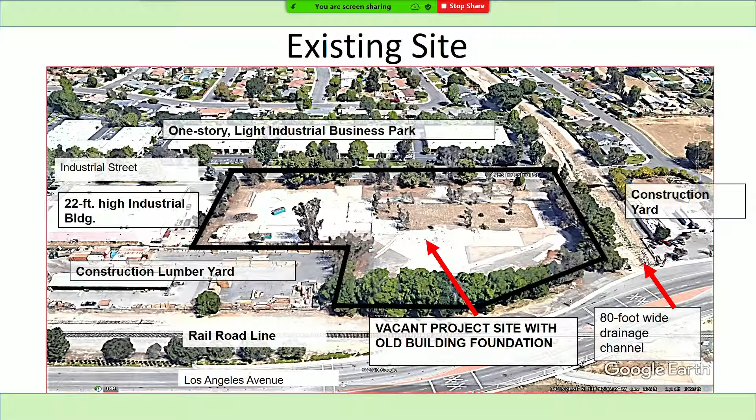So currently, just to recap, this is the current location, that's the vacant lot. It's surrounded by industrial uses to the north, east, and west, and by the railroad tracks to the south.

Here is the north elevation of Building A. The previous elevation is on top and the proposed is on the bottom.

All of the revised elevations will include corrugated metal panel accents, patterned concrete panels, colored stucco, concrete masonry units, stone veneer, clear glazing, metal canopies, and aluminum composite panels that add more detail and articulation to the buildings. The building's colors remain predominantly gray hues, but different materials, textures, and surface finishes add variety. For example, the applicant added aluminum composite panels and stone veneer to Building A, with metal panels and scoring in similar colors applied to the other buildings, varied with different finishes. To give more depth, shadow, and definition to the elevations, the horizontal and vertical scoring will be accentuated to provide separation between panels that are on the same plane but have different patterns.

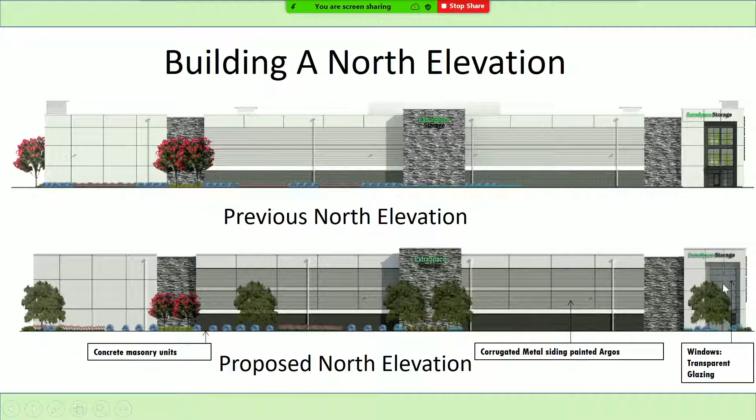So if you notice on this elevation, you can see the cursor here showing they added the concrete masonry units, shown in black. Also the corrugated metal siding panel, in the color Argos. And the window includes some transparent glazing.

This is the north perspective of Buildings A and B. This is the rendering.

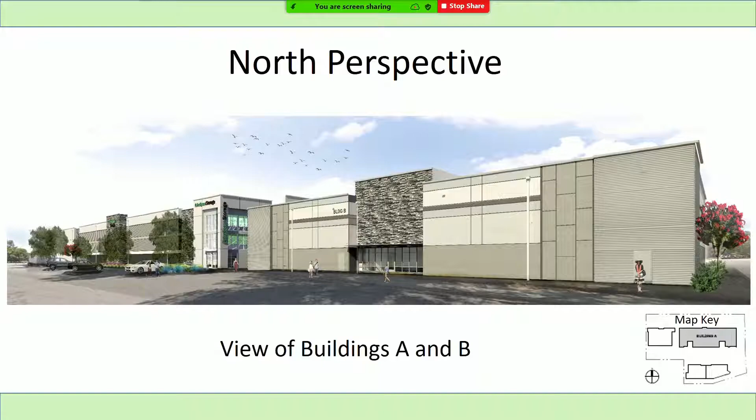Here's Building B's elevations. You'll notice the brick veneer, this time a little darker, and they added some additional score lines to break up the building. You have different colors, some hues of grayish-green, and the stone color itself, along with horizontal metal siding with a 4-inch box rib.

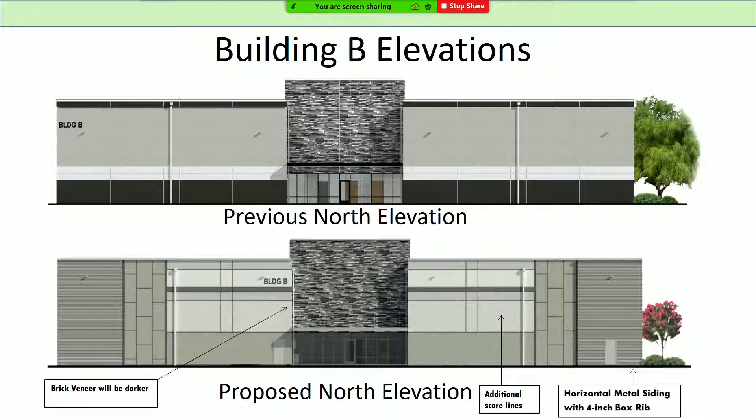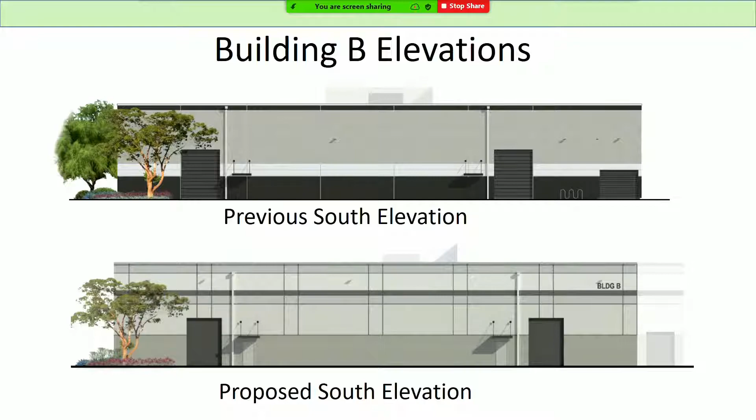Here's Building B's south elevation as well, and the southwest perspective of Buildings B and C. This is the perspective from the lumber yard on the west side. Based on comments from the Commission at the last meeting, they were looking to add more landscaping along with articulation on those south elevations.

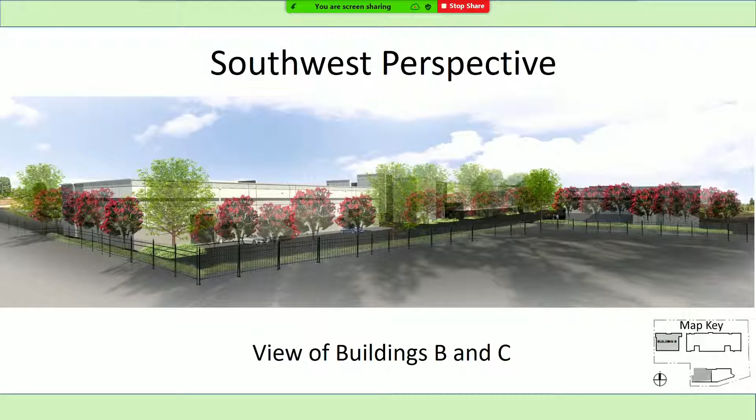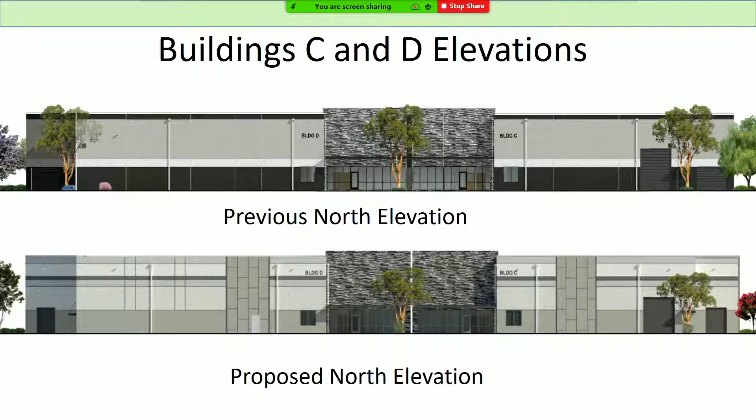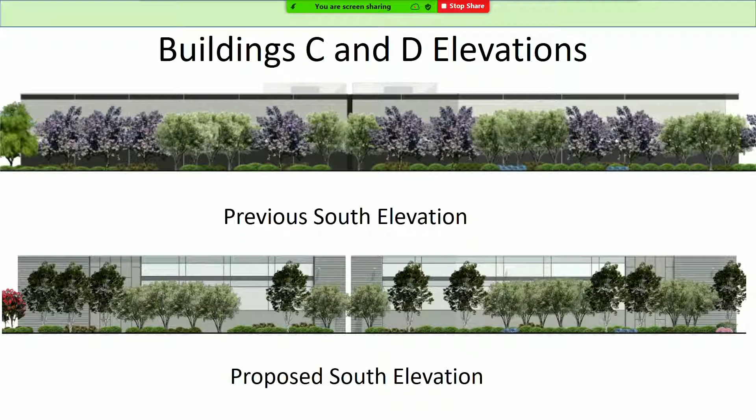Here are the north elevations of Buildings C and D, and here are the elevations for Buildings C and D on the south side, previous and proposed, with landscaping. Here are the elevations without landscaping from the south for Building C and D facing Los Angeles Avenue, showing they've added a concrete reveal pattern and additional score lines to break up the colors with white, black, dusty blue, and beige. Once again, they've added horizontal metal siding with a 4-inch box rib.

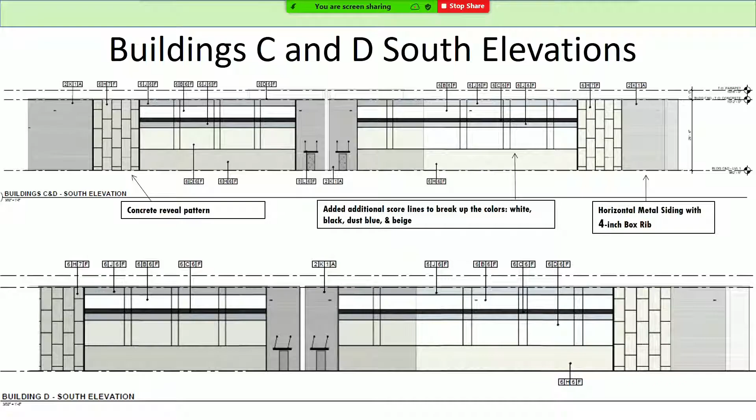And here is the south perspective from L.A. Avenue for Buildings C and D.

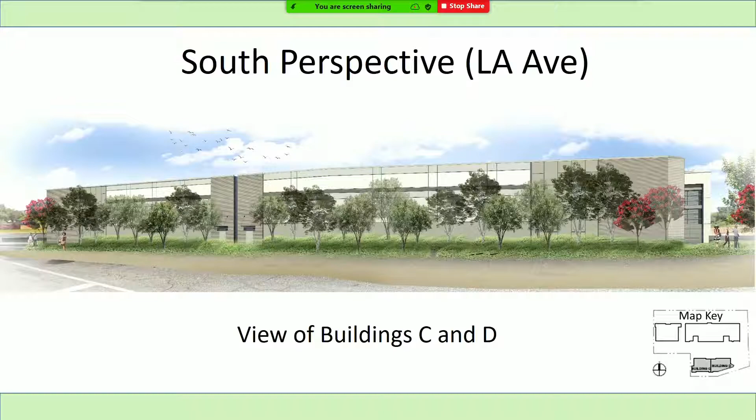Staff recommends approval of tentative parcel map TPS 692 and CPS 827. This concludes the presentation. Staff will answer any questions.

Do any of the commissioners have any questions of staff? No. Hearing none, we will now open for...

...the public testimony portion of the hearing. Would the applicant like to present the project? I'll remind the applicant, you have 15 minutes for your presentation.

Yeah, this is Robin Murphy. Can you hear me? Yes, we can. I can hear you, yes.

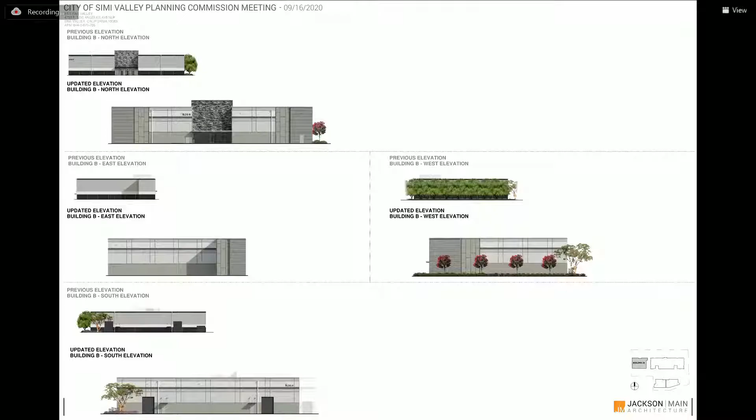Excellent. I am with Jackson Main Architecture. I'm a principal here. I also have with me Natalie Doyle, who's going to show the graphics, and Ann Judkis is here as well. Ann has been working on this through several different planners for the last year and is very familiar with the project.

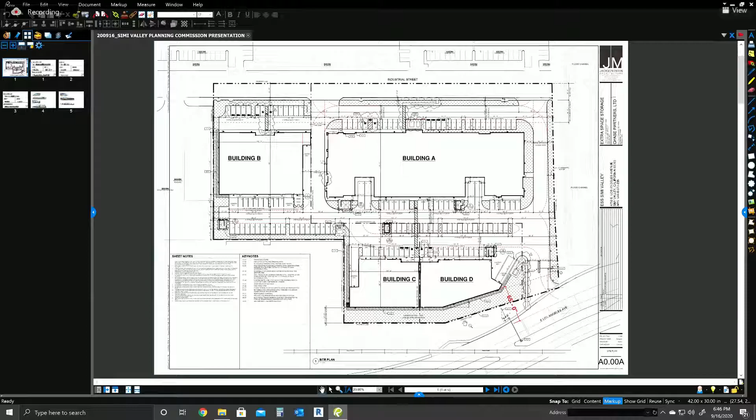There weren't a lot of comments about buildings A and B, as I think the Assessor noted. Most of the comments were on C and D, and we're going to go through those in a little bit more detail. C and D have a 27.5-foot landscape buffer and trail to the south of the property line, plus some right-of-way separation and some landscaping that totals, at closest, approximately 65 feet long, so that's a big separation.

We've tried to represent that in the renderings. Let's go to the elevations, Natalie.

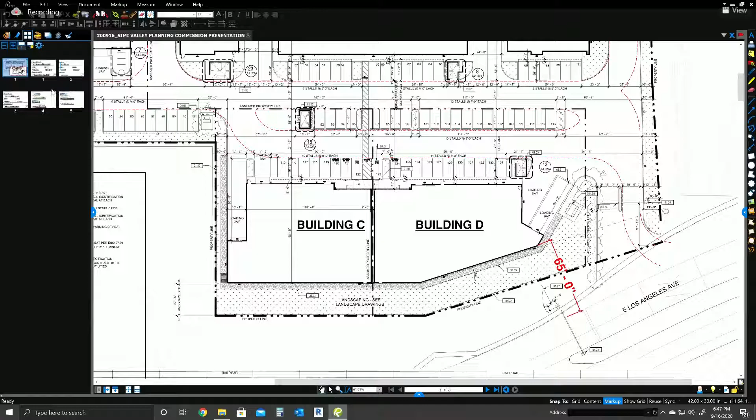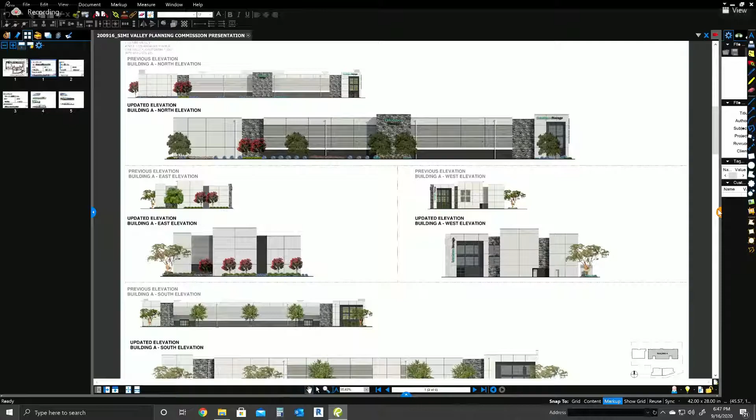We thought the best way to explain this would be to show what we previously presented versus what we're proposing. As the Assessor went through these elevation by elevation, I'll cut my explanation a little shorter. In general, what we're looking at here is building A. At the top is building A's prior elevation, and right below it at a larger scale is what we're proposing today.

The main thing here is we're trying to tie these buildings together. There's not a lot of fenestration in storage buildings, and certainly not in industrial buildings either. So we're trying to concentrate interest into the corner elements, and that's what we've done in the storage building. That hasn't really changed other than the addition of some higher quality materials, ACM panels on the ends.

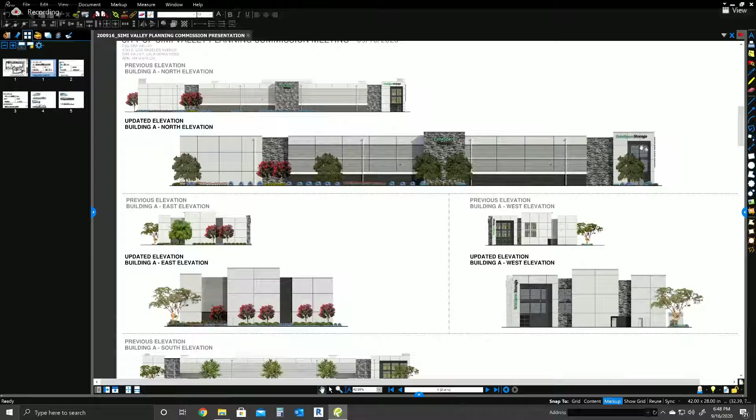One of the things we wanted to do was tie the horizontal elements together better, and we did that by tying some trim lines from the upper stucco line through the horizontal metal panels - you can see that right there, and it terminates right above the CMU. So this is giving it a little more texture, and we've done this on all the buildings to give it more detail and texture rather than blank concrete.

So this building has a lot going on in terms of materials, and it's branded to our customers' image, but we're also trying to tie some of the colors and materials back to the industrial buildings on the site. If we go to the next view, the east elevation, there really aren't changes between what was proposed previously and what is proposed currently on this elevation. We didn't feel it was necessary, and it wasn't brought up in the last meeting.

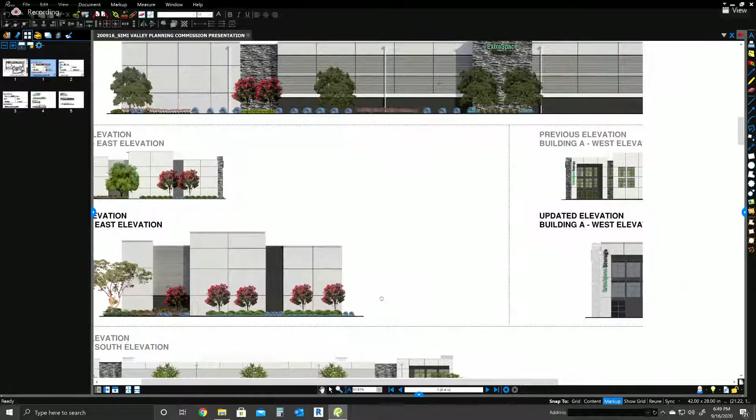If we go to the west elevation, what we've done here is added the ACM panels. We've also increased what we call hinges - that's that piece there, and then there's another one - and used the variegated stack stone in both the recesses, which ties back to some of the other articulations on this building. It's also the appropriate place for a material change because it's inset.

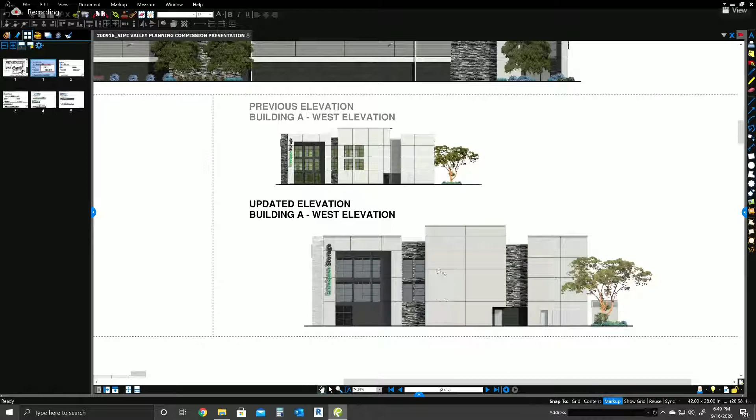We had to remove a little bit of the glazing, as you can see in the stucco portion, due to some conflicts with mechanical equipment. But we feel like this elevation has a lot going on. It's well proportioned, and it ties back to the other four elevations. Let's go to the next sheet - this elevation is the south.

Up on the top, one of the comments in the August 5th meeting was that there's a lot of horizontality here, and it's a little more monotonous than the other elevations. So what we did is we didn't introduce a new material, we pulled the stucco material we've been using throughout, particularly on the end elevations, and introduced it at asymmetric parts of the elevation. You can see it there.

Also here, we've got the CMU base, and we've got the trim lines coming down from the stucco through the metal and terminating at the top of the CMU, which is a metal band. So there's a lot going on there, and a lot of it is subtle.

As was pointed out, the color scheme is pretty gray and white, but we look at it as timeless and sophisticated rather than a lot of storage facilities that will have orange or blue or some vibrant color. We're purposely keeping this tone down because we feel it will intermesh with the adjacent context better.

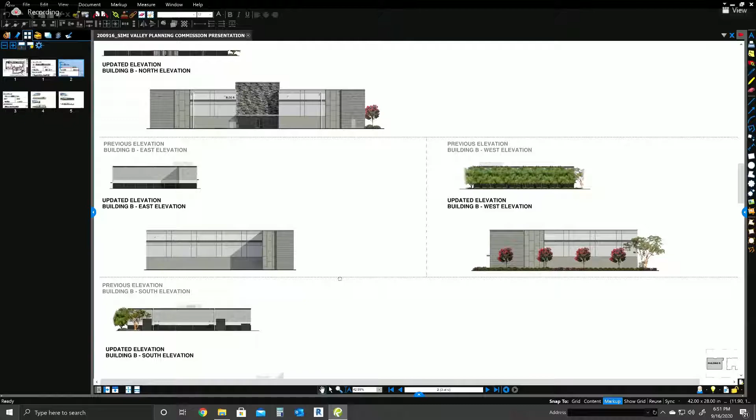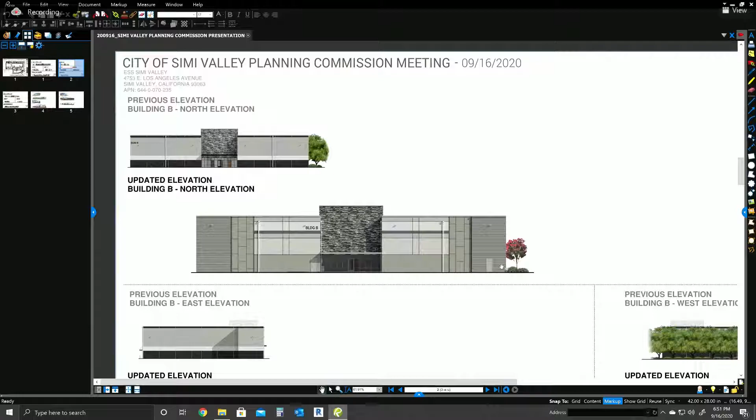Let's go to the next sheet. So here, this is building B, and Cesar went through this. Some of the same detailing that we just talked about on building A. What's new here is this corner element of furred metal corner that wraps around and creates a bookend. Natalie's circling it there with the cursor. What that does is it wraps the building and contains this horizontality.

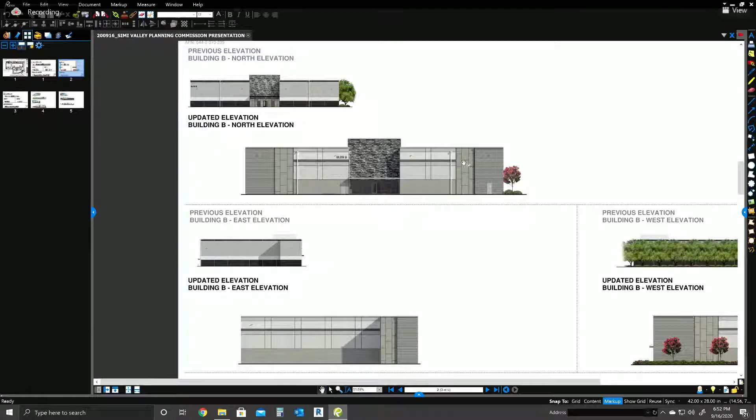We're also using score lines there just inside of that with painted concrete. Those scores would be 2 inches wide by 3/4 of an inch. They'd be set into the form of the tilt-up, and they'd be bracketed by 6-inch scores. You can see the darker line on the edge of it — that's a 6-inch by 3/4 inch deep.

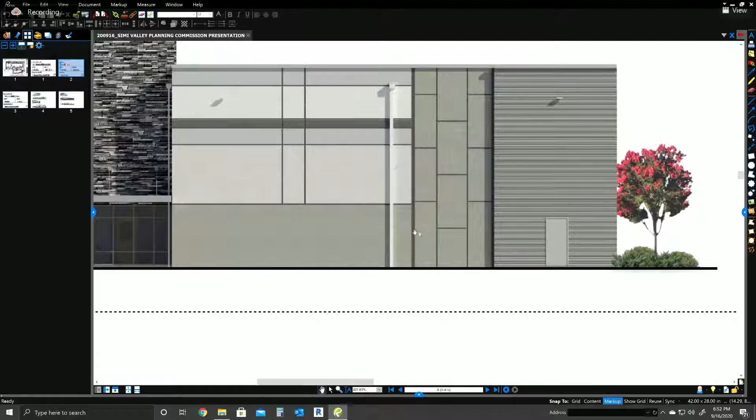And just to give it some texture and shadow lines, and to kind of break up this horizontality, which I think we had a lot of in the previous version. Let's move on to the next elevation.

This is Building B East elevation. Here we're bookending it, same detailing. We're basically using that running bond, vertical bond to break up the horizontality. And then you can see previously it was essentially a blank facade with some color, but it's very horizontal.

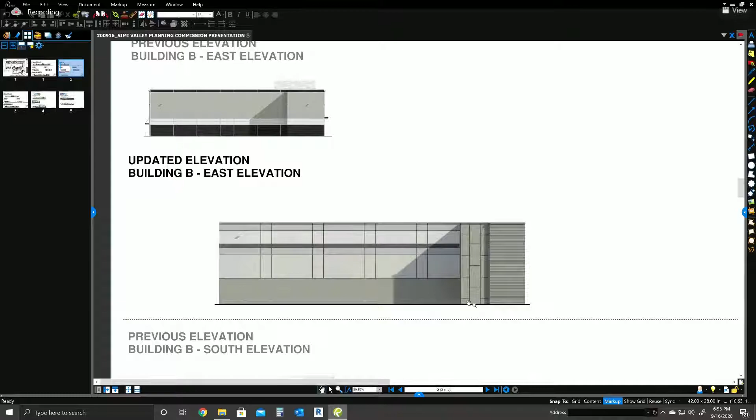What we're trying to do in a very subtle way is create some contrast to that horizontality with score lines. These lines probably are rendered a little bit darker than they actually would be in reality — it'd be mostly a shadow perception as you look at it. Let's move on to the next.

Something else on these elevations, there was quite a contrast between the ground floor color and then above, and we've reduced that to tie it together better. We think it's a better marriage to have this calmer color palette as opposed to the contrasting color palette we had before.

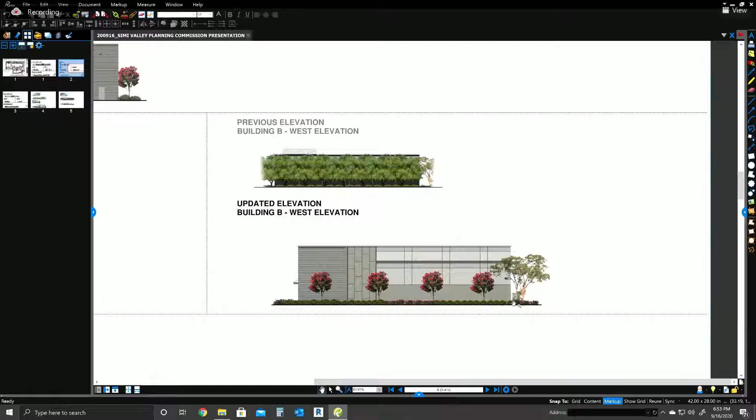The landscaping has been improved as well, and it's accurately shown to what is shown in plan by our landscape architect. Let's go on to the next sheet. Trying to add some color in the landscaping, seasonal color.

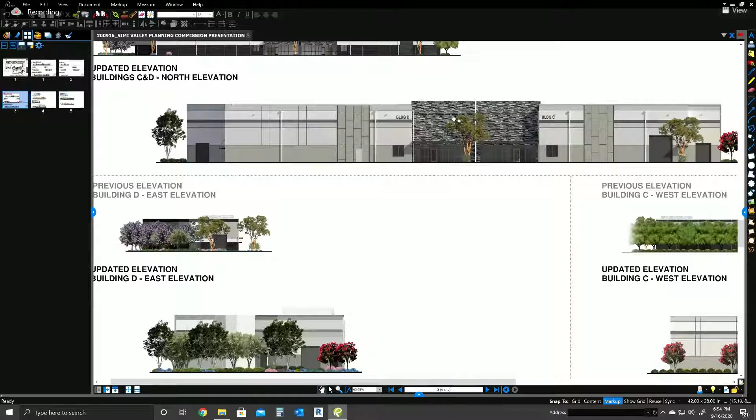So here we are — this is building C and D. Here's the inner view, the north elevation. This is the elevation that faces the storage facility and building B, so it's kind of the entry. There weren't a lot of comments on this, but we took essentially the same palette of material and colors and treatments and applied it to this so that it's not separate from the other elevations. The score lines vary between 2 inches and 6 inches wide, depending on where they are. There's a stacked stone in the center still, and then now we have these going on. I'll show you the corner treatments as we wrap around the building.

So in the next view, we have the east elevation. You can see the accurate landscaping depicted there. Essentially, we've got the same color palette wrapping around the corner. It's not very easy to perceive exactly what's going on there, but it's the same treatment that we have on the inner portions. Let's move on.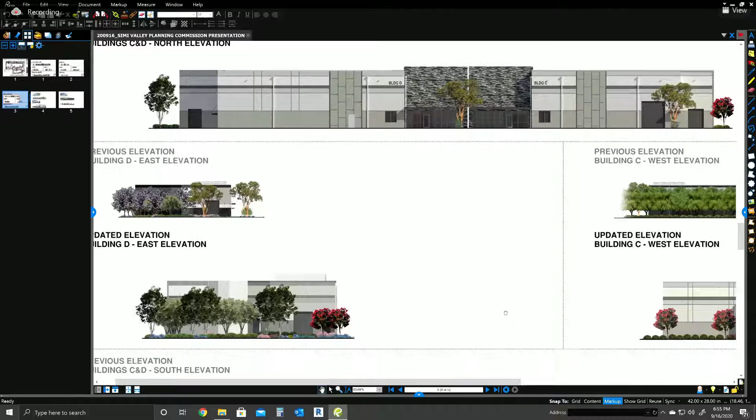So this is the building C west elevation. We have here the bookend — that's actually a 10-inch, a significant fur treatment. Essentially what's going on here is we still have a tilt-up concrete industrial pad building, but at the corners we're adding 6-inch metal studs vertically as furring, and then we side those with a box rib that's 4 inches horizontal, 4-inch profile, and approximately 2 inches in depth. So it has a lot of profile there, and it's going to create a shadow line, and the intent here is that it breaks up as the buildings turn.

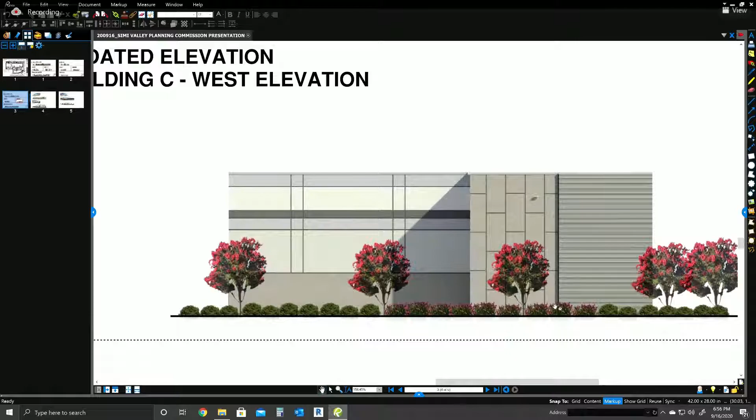We've got this breakup, and then we've got the running bond again, and the same score treatment and colors, and they all wrap up with the storage facility as well. Let's go to the south elevations.

So these are the south elevations of buildings C and D. This is the view from East LA Avenue, and as I mentioned, there's a 27.5-foot buffer of landscaping south of this project, and then there's a total of 65 feet of separation between it and the arterial.

You can see the bookends on each building, and you can see some of the same treatment. We're trying to be consistent as we wrap around the building. It's really hard to tell in the first image, but it was a very horizontal building and very much monolithic. There wasn't a lot going on. There was a trim band that you can't see very well through the heavy landscaping, but essentially there wasn't a lot going on.

When we looked at this Xebec project that we referred to, we took cues from it that we felt gave it a little bit more character without making it look like something that it isn't.

One of the things we try not to do in architecture is make a storage building look like an office building, or an industrial building look like an apartment building. So we're not trying to do that. We're just trying to give it some pizzazz and make it feel like there's some care put to it, and that it's got a pedestrian human scale to it, and it will be a good complement to the neighborhood.

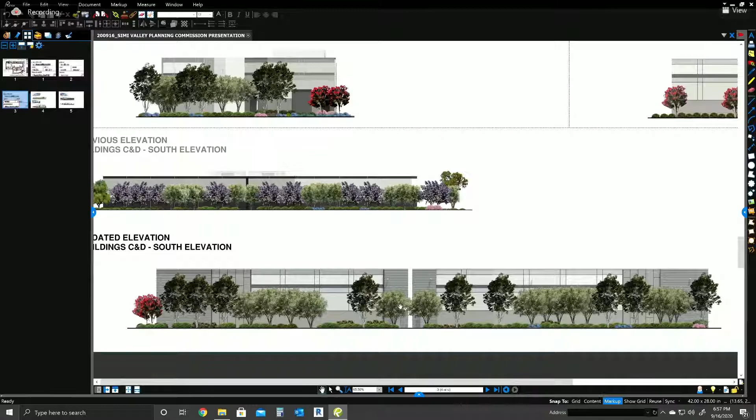I think that is all. Those are the elevations, and I guess based on that, we'll just wait for your questions if you have any.

Are there any questions of the applicant? Commissioners? Yeah, I have no questions. This is Commissioner Hodge. Okay. No questions from... sorry, Commissioner Tolson? Nothing for me.

Okay, I do have a question. Do you have a rendering similar to the one from your original submission? It was on page 4, the photo simulation exhibit, project viewed from westbound LA Avenue, and conversely, the photo simulation project viewed from eastbound LA Avenue. Those were my two areas of concern, that they were just huge buildings.

So here's the views we had before, and here's what we have after, from LA Avenue. And I think the main takeaway here is the corner treatment. The mass in the original view, you can kind of look at that. It's a little bit different perspective, but it's very blocky and massive, and really no articulation above the 8 or 9 foot level.

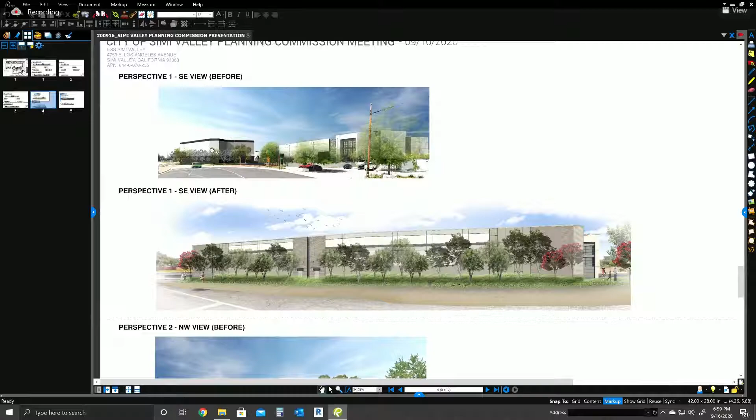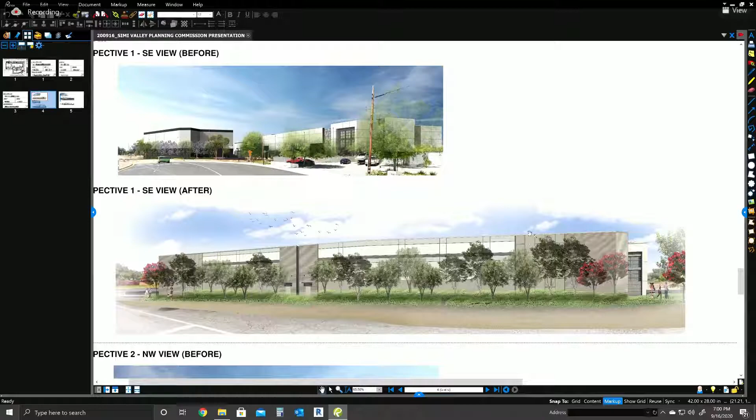So what we tried to do, based on the elevations, it's the same story. It's basically trying to create a finer tooth to the breakup of the building as it wraps around the corner in 3 dimensions. It's not a 2D elevation, but 3D, and give it some shadow separation at the corners as well, because that's really what it was missing. It just didn't have a treatment to tie everything together and bookend the buildings as you go around the site. So these views hopefully explain that.

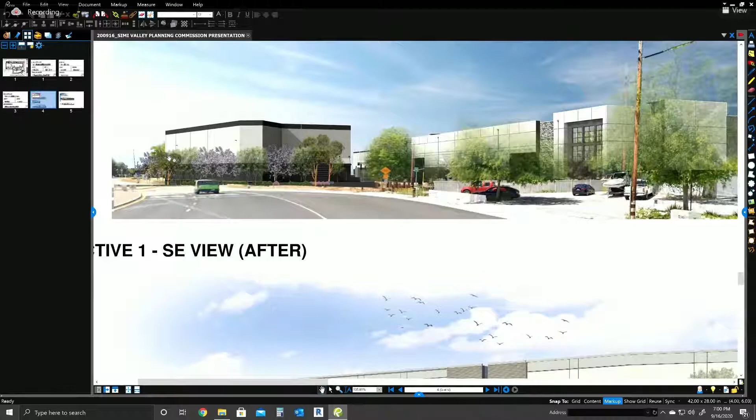So again, what I'm seeing on my screen, perspective 1, southeast view, we'll just call it the green car that's in the upper left-hand corner of the upper image. I'm looking, yeah, your arrow, your cursor's right on it. That's obviously... do you have a view exactly like that of the after? Because it looks like the one you have just down below. That's right.

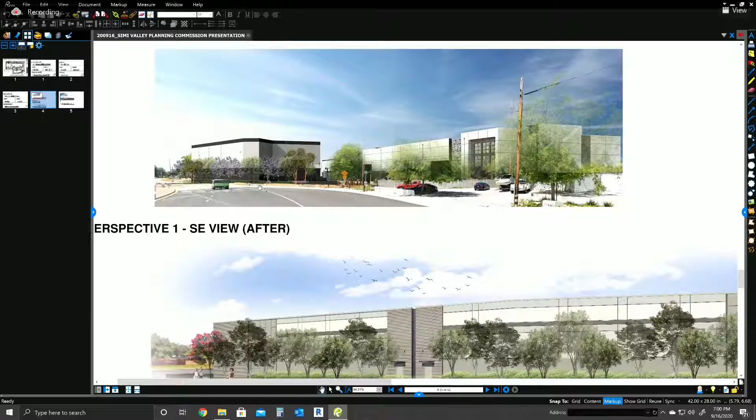Perspective 1, is that with your changes or before your changes? The perspective below is current. It's after we made the changes. The view perspective is not exactly the same.

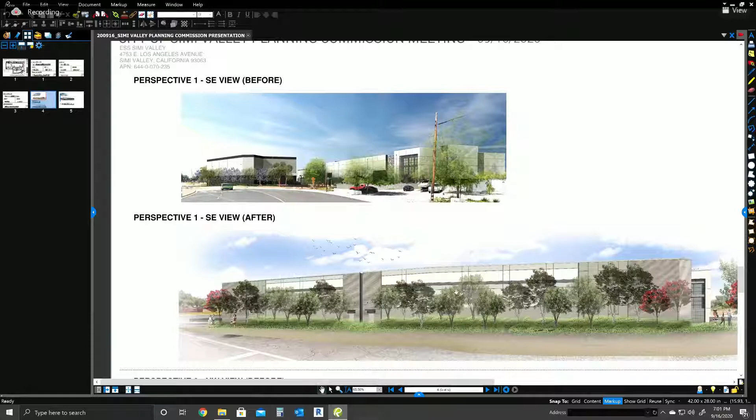Unless, Natalie, do we have another view that shows the same exact orientation as the prior? Because what I'm trying to determine is what has changed on the southeast view before, that large white area. What is that looking like now?

It's that. So what we're showing here is a lot closer to that building, because that's where the major changes were made. We wanted to show it so that you could actually see the detail. If we kept that same perspective, it would be compressed and it would be difficult to read the significant changes.

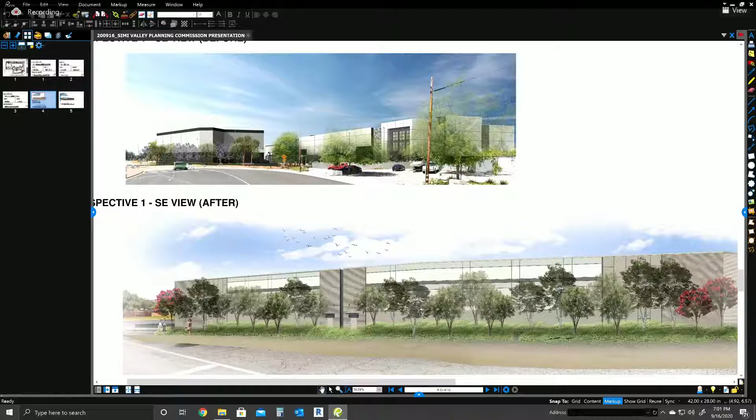So on the top view, somewhere in that building is where it looks like the buildings are split in two, would be somewhere down, like right where the green car is or something along those lines? Yes. Okay, correct. That's correct. Do you have the same for eastbound LA?

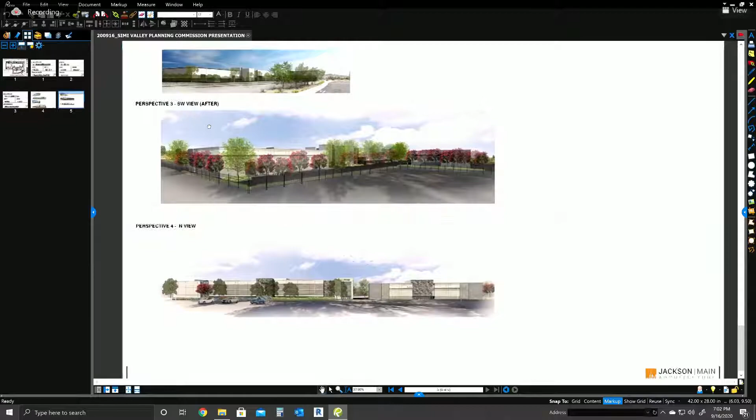I apologize if I missed those as part of the presentation.

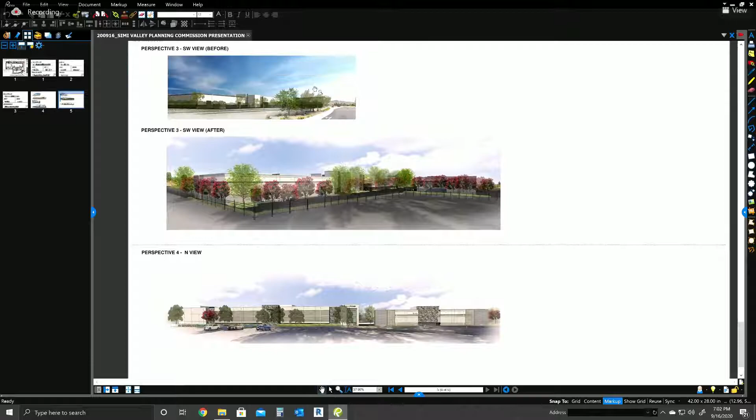If I can jump in here, Natalie, eastbound would be the lumberyard view. Nope, that's not it. So this—oh yeah, it is. So the upper one.

Previously, yes, and my understanding is there's some view obstruction there that we were asked to remove to explain the building as you view it from this direction. There would be some blockage. It wouldn't be perceivable, but that's why this rendering is a little bit different than the previous one.

So again, in perspective 3, the southwest view after—where is LA Avenue on the first perspective on that page?

It's just beyond the field of view. So you'd be—I'm assuming to the lower right? Yeah, that's correct, yes. Okay, that answers my questions.

Are there any other questions of the applicant?

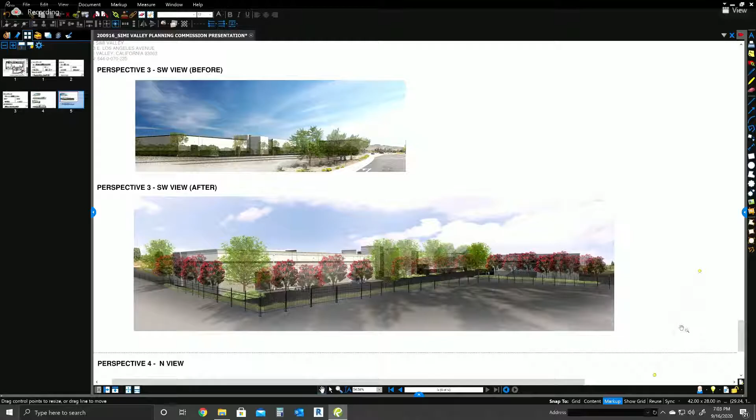Moving on, do we receive any requests from members of the public to make a public statement on Zoom? I believe that would be Maggie and Chet. Are they available?